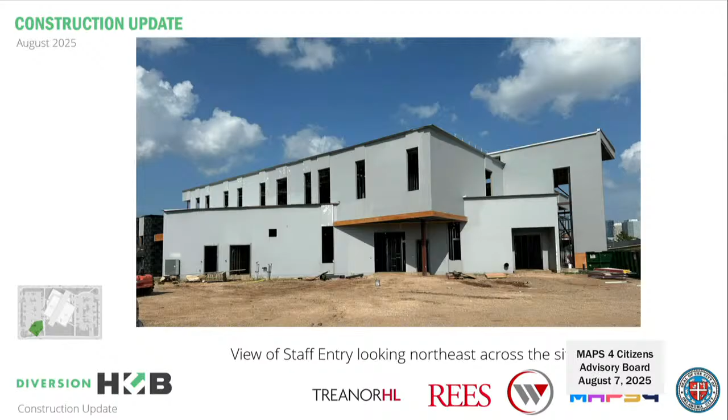This is kind of the southwest corner of the building looking northeast. It's the side of the main entrance for the staff. There's already a lot of masonry going up on that side of the building. Just another view of that side, swinging around to the right a little bit. If you go out on the site today, that area looks very different - there's a lot of activity, a lot of materials out on site.

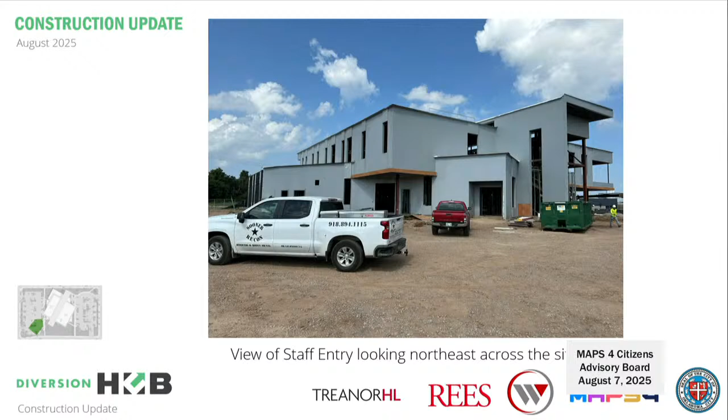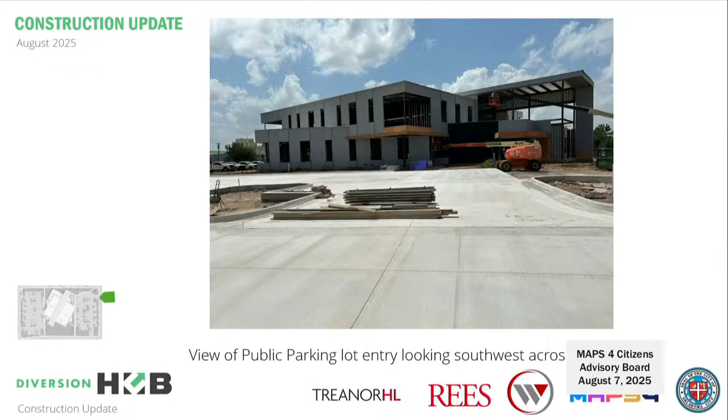In addition to the masonry going up, they have begun some of the work on the metal panel. They have a large metal panel mock-up for the composite panel sitting on the west side of the site. This is a view looking to the southwest, so you're seeing the northeast corner of the building - the main entrance, some of the parking lot has gone in on the east side. This is looking into the main entrance and lobby.

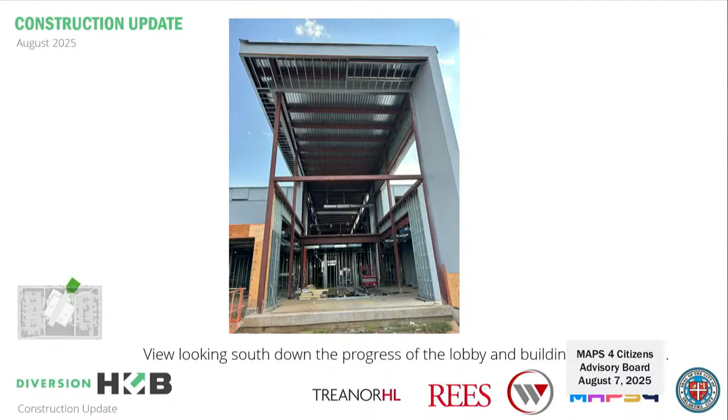The actual entrance is off to the left, but again, lots of progress there. You're starting to see a lot of the interior steel framing going up. I would say the interior steel framing is pretty substantially complete. They're just wrapping up details, some recesses for technology, monitors, et cetera. You're going to see in a minute some of the electrical and mechanical roughing that's happening.

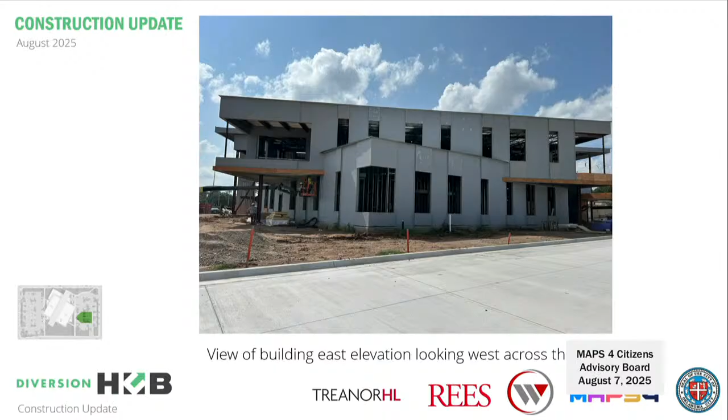This is the northwest corner of the building looking southeast - this is the training room. And again, that side of the building where the staff was - I'm sorry, this is actually the southeast corner of the building. This is the back of the building, the south end.

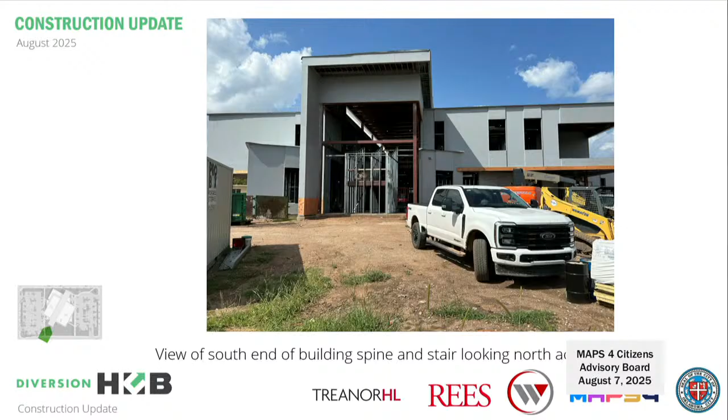You're seeing what will be a large expanse of glass looking into the staff entry. That's the staff staircase that goes up to the staff workspaces, which are really coming out fantastic. All the metal framing you see there is temporary - that's going to be a glassed-in stair. There'll be some area underneath the stair for staff to use as another place to work or just to get away for a little bit. But it's going to be a really, really nice space.

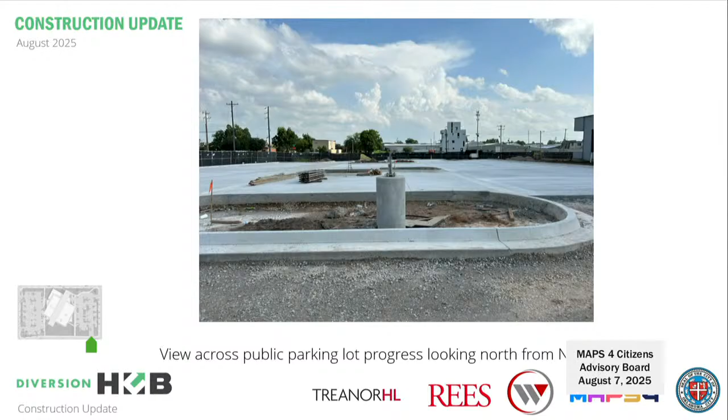Again, just more progress on some of the site, parking. As I mentioned, lots of work going on the exterior skin of the building. Mock-ups going up, mock-ups getting approved, lots of masonry going up all over the building.

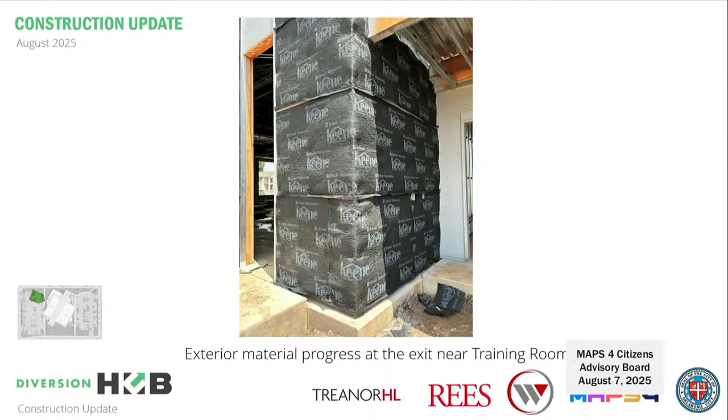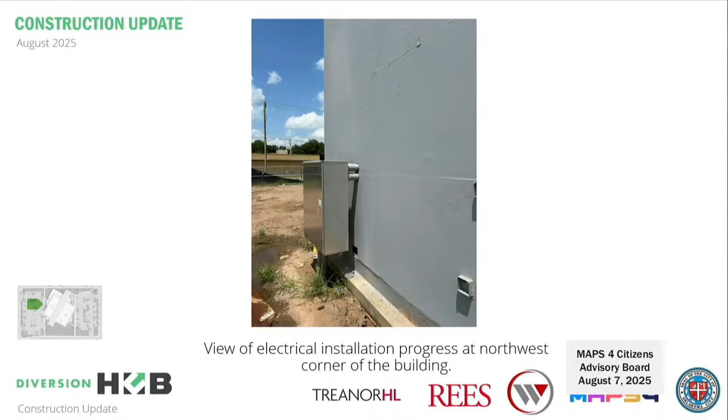A lot of the electrical infrastructure and installation is in progress. This is another one of those spots, if you went out there today, it would look vastly different. The box had been removed, masonry has been installed, the box has been reinstalled. Lots of good progress there, and lots of electrical installation and infrastructure going inside the building as well.

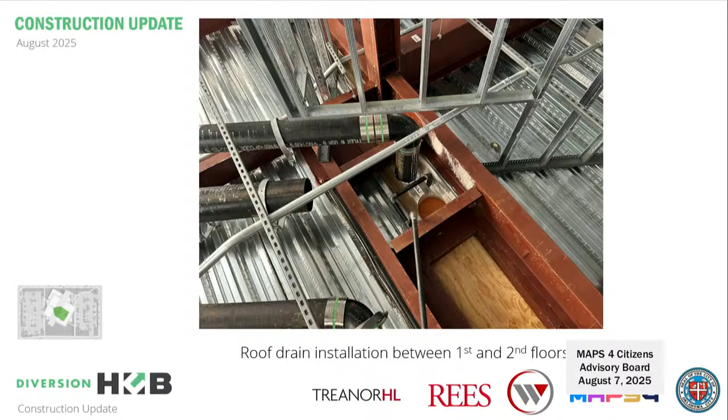Lots of coordination with some of the mechanical and plumbing items. You're seeing a photograph of some of the roof drains coming down and coming through the floor from the roof into the second floor cavity. And then just a shot of some of the electrical work that's going in, with support bracing for some of the monitors and things that are going in.

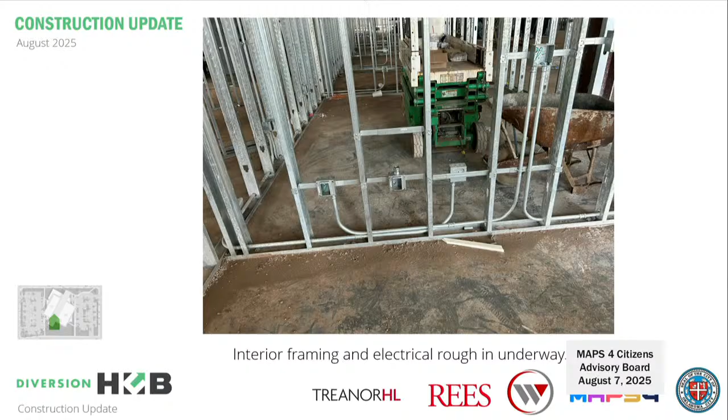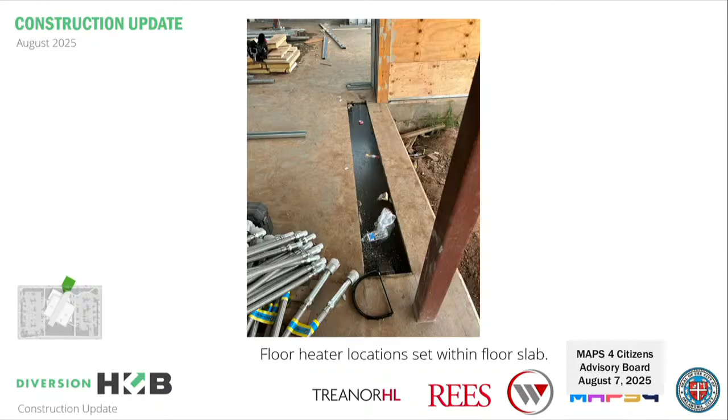We've got an interesting building with some interesting conditions, so we've got some floor heaters going in. Those mostly are going in on the north side of the building in the lobby atrium area up against those large expanses of glass.

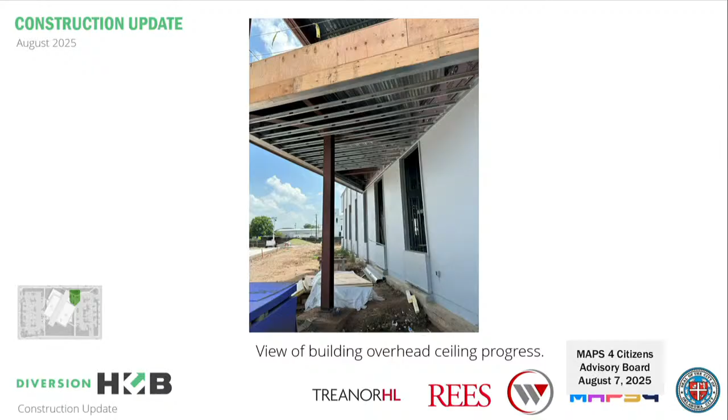Again, work on the outside continues. You're seeing some of the exterior ceilings going in, so that is below the staff break area. And then a view from inside.

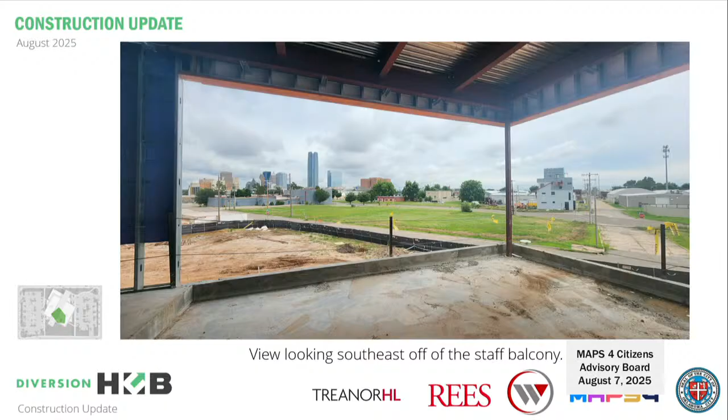This is one of my favorite things when I was out on site. You're going to get some really spectacular views of downtown. Unfortunately we don't have it in this slide deck, but there's some really amazing views looking east down 6th Street. You can really get a feel for what's happening in this part of town and how things are coming our way. Just being part of the project team and the diversion hub, this area of town will look vastly different in the next 10 or 15 years, and it's really exciting to be early in that process of making that transformation happen.

More, just a look at some of the interior steelwork. This is really fun too because I think we're starting to really get a feel for just the way the building lays out, how some of those spaces feel horizontally and vertically, just what the volumes of spaces look like.

As I mentioned, super, super excited about that second floor and staff work area. It's going to be amazing compared to what they have today. I think it's going to really help them do more and better things.

One of the things, and it's not necessarily as relevant to the project here, but the program is doing so well, they're growing so fast. They've actually grown into Cleveland County beyond Oklahoma County. So I think that's a testament to how well this program is working and what it's bringing to our communities in central Oklahoma.

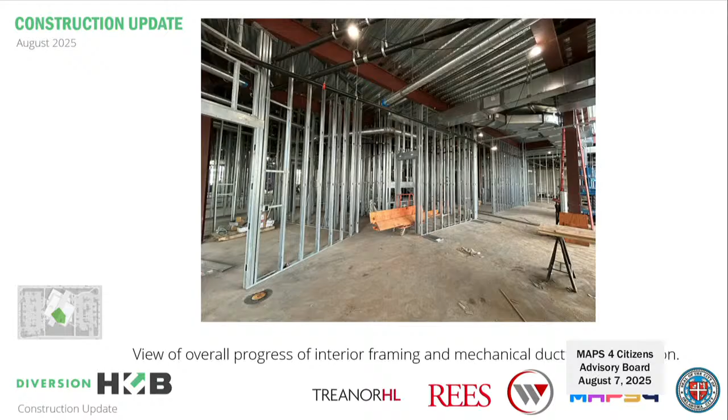One of the things that we discussed in our meeting earlier this week is change order number 3. We have 7 small change order items that we discussed. Let me flip to that page. So the majority of those are structural, mechanical, and electrical changes.

Those were all necessary after construction began, so we're coordinating on-site as-built conditions that happened during construction, engineers' drawings, and the subcontractors' drawings. All of the concrete structural items were identified before the concrete was actually poured, so really it involves some modification of formwork just to coordinate with what's happening in those areas, and I'll go through those quickly.

So we have some column base modifications. We had to adjust the height of 8 column bases to make sure that they were in the correct height for the steel columns. That was a concrete issue.

There were some slab modifications to coordinate with the floor heaters, so you saw that slot in the floor in one of those earlier slides. One of the things we wanted to make sure was we had the correct clearance between the back of those heaters and the exterior windows, so that was coordinated. There was a concrete grade beam extension at the main entrance, so we have some conditions where we have some thickened walls, and there was one area where we had to expand that a little bit to make sure that we had full coverage under the wall.

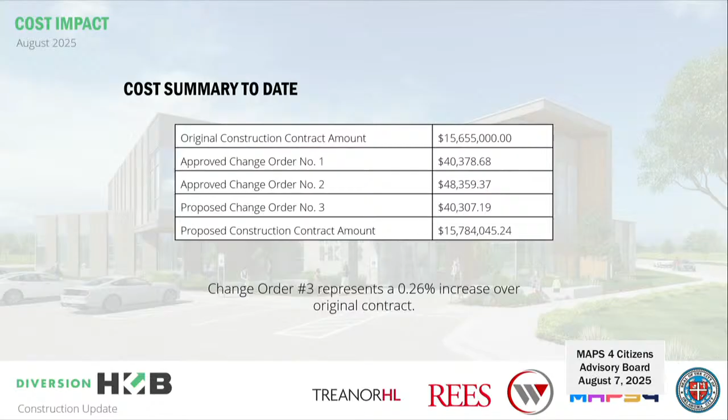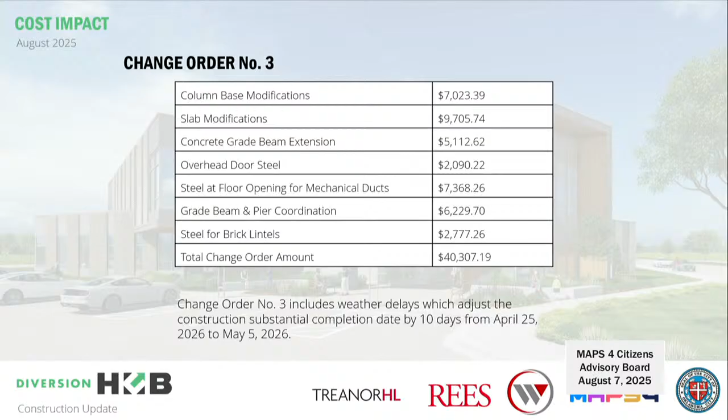As I mentioned, it's been a really wet summer, but the contractor is doing a great job trying to catch up. We're still looking for completion in spring of '26. One of the questions asked by the committee was how far along we are - we're around 50%-ish done with construction. It seems like maybe there's more because the building envelope is pretty close, but there's a lot of work to do on the inside.

So just a 3-month look ahead: finishing up the exterior framing and sheathing, there's a little bit left to do there. Roofing is being installed, rooftop equipment gets installed pretty soon. MEP rough-in is ongoing. The perimeter sidewalks around the site, the ADA sidewalks, should be complete by mid-month. Really, the next step on the inside is starting to put up some of the drywall, which will happen in the next few weeks.

Next week, some of the windows are going to start going in - they haven't put up the framing for the large expanses of glass yet, but if you're out on site you can see the square rectangular openings. They've already got some of the aluminum in there for the windows, so that's progressing. We expect the building to be weathered in by the first week of September. Lots of exciting stuff. Masonry and all that is ongoing.

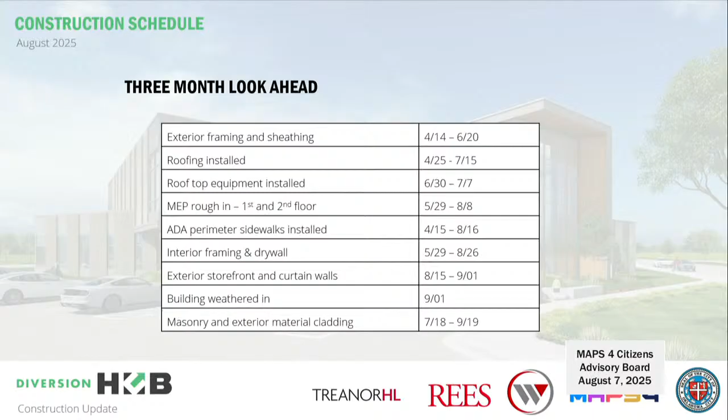So just to wrap up before I open it up to questions, I want to express the whole project team's thanks to the City of Oklahoma City and the MAPS office. The MAPS office has been fantastic to work with - we absolutely love Jim, he's the best. Also the Diversion Hub staff and the Arnall Foundation have been a great client, a great partner, and great friends. So with that, I'll open it up to any questions.

Thank you for your presentation. Any questions for Farouk? Okay, no. Great job, you covered it all. Thank you. I expected a tough question from Todd.

All right, moving on to item 2D, recommend approval of change order number 3 with Wynn Construction Company for the MAPS 4 Diversion Hub project for $40,307.19. I'll take a motion and a second.

Okay, the motion passes. Thank you, and thank you again for your presentation.

2E, construction update on MAPS4 Innovation District Connectivity Phase 1. Continuing on with our construction updates, we have a project for connectivity in the Innovation District. Luke Schmidt from Kimley Horn is here to take you through this presentation.

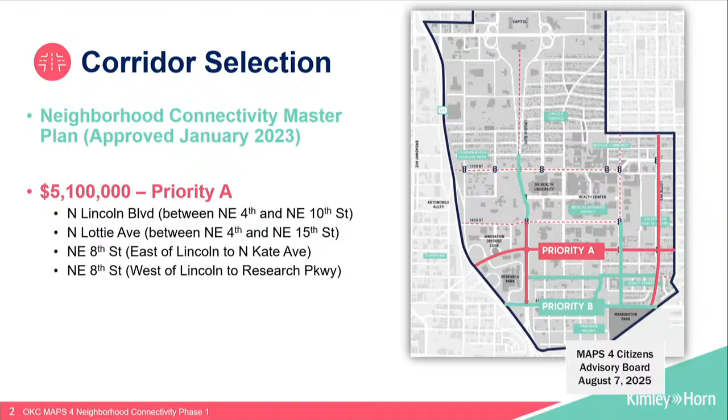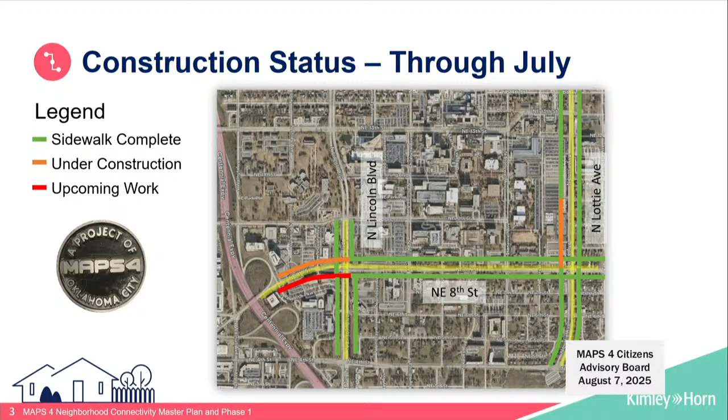Want to give a quick update on where the contractor is today. We've seen a lot of progress over the last month since we've last been here. The contractor has wrapped up a lot of the Lottie sidewalk improvements. You can see there's a section that one crew is working on as they travel south down Lottie. Also, Northeast 8th Street is currently under construction in front of the Convergence area. So really excited for all the great work that's been done over the last handful of months.

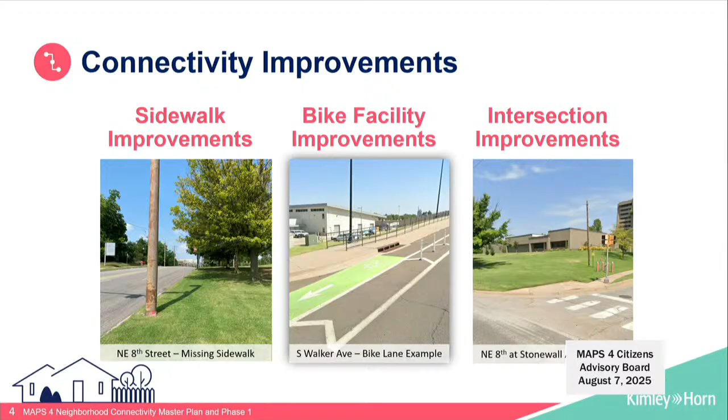As a reminder, this project is a mix of sidewalk improvements, bicycle facilities that are upcoming, as well as intersection improvements. A lot of the sidewalk and intersection improvements y'all can see out there today. This project has over 3.5 miles of sidewalks and 23 intersections being modified. So a significant amount of infrastructure being implemented as part of this initial phase of the project.

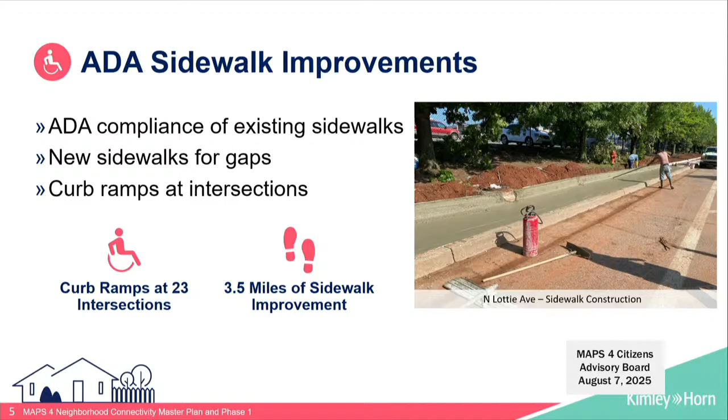So with that, I'm going to turn it over to Christina to give a couple updates on what we're seeing in the field. Thank you, Luke. I wanted to touch on some of the completed improvements we've seen as part of this project. There's a handful of construction groups working, so we're kind of spotty in the areas we've touched so far. We do have completed improvements on Lincoln, Lottie, and 8th Street.

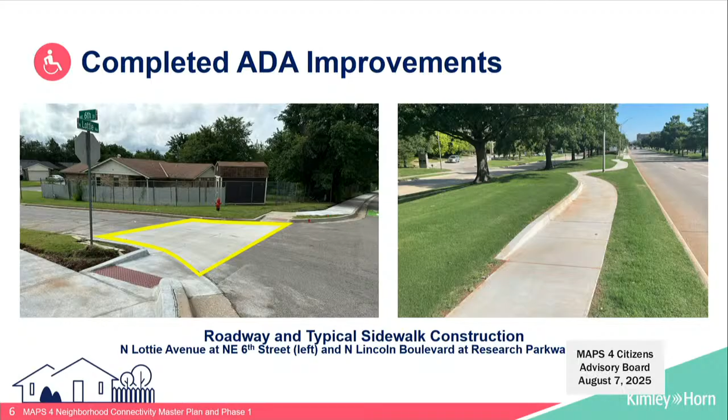Some of the pictures shown on the screen include ADA improvements along linear sections of sidewalk. On the right, we have a photograph from Lincoln Boulevard, where we continue the concept of serpentine sidewalks to create a comfortable, inviting environment for folks to walk around on. On the left is also improvements on Lottie Avenue that are pretty typical throughout the project: curb ramp improvements at intersections, side street improvements as needed for ADA compliance.

Looking at some in-progress ADA improvements along Lottie Avenue specifically, we had a few drainage things we needed to work through. On the west side of Lottie, it captures all of the water that flows off of all the parking lots from the OU Health facilities, so obviously a large amount of water coming through this area. There were some existing drain structures that had been collapsed or were in poor condition currently.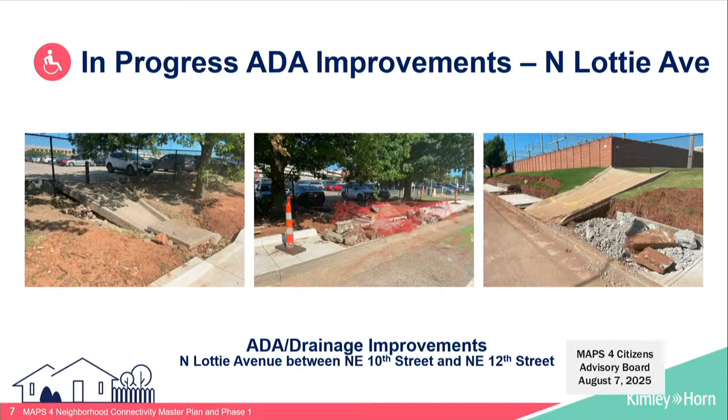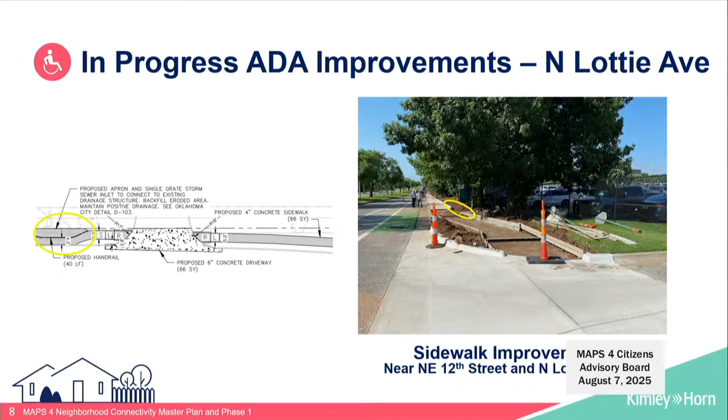Looking at more improvements here on Lottie, just north of those drainage improvements we were just looking at, I wanted to highlight how the contractor's been able to follow very closely our plans. Moving through the drainage and then into the driveway improvements, we made sure we kept an ADA compliant pathway throughout, with the minimum widths needed, moving from drainage to driveways all along the frontage of Lottie, along the OU Health parking areas.

Looking too at the paver enhancements, this photograph is from the intersection of 8th Street and Lincoln. We've gone through on the northwest and northeast corners, pavers have been installed. Those two corners are basically wrapped up.

We have signal improvements in there as well. We wanted to make sure that we had a design that worked to be able to put signal poles in an area that would be acceptable for ADA compliance with the push buttons before we went and put the pavers in, just to make sure we weren't tearing out pavers that were already put in.

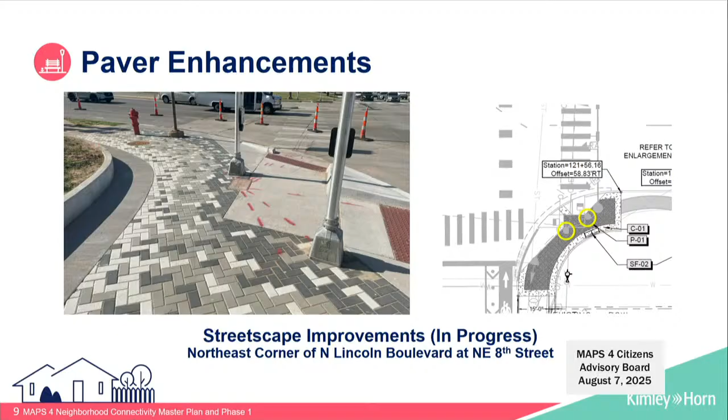So Rudy's done a great job of taking our design and making it real life with these pavers. At the intersections, we wanted to have a visual enhancement, so we proposed a gradient moving from darker to lighter pavers just to create a little bit of visual interest at the intersections.

Talking more on the traffic signal upgrades, this picture is still from 8th Street and Lincoln. Like I mentioned, the northwest and northeast corners are done, so we have the PED poles placed and the pavers in. Since the southwest and southeast corners are still under construction, we have those PED heads taped off for now, but we're making progress on the signal improvements throughout the project.

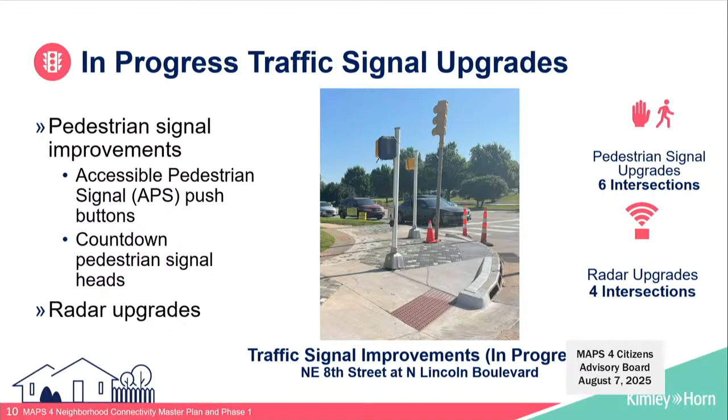Just a reminder, we're doing radar improvements as well as part of this project. There are 4 intersections that currently did not have radar or did not have sufficient radar, so we're making those improvements as we move throughout the project.

Looking at Northeast 8th Street, as a reminder, that's our enhanced area. We have a lot more landscaping improvements and more hardscape improvements as well. Something in the past few weeks that the contractor has been working through is the installation of the Silva cells.

The Silva cells have gone in very quickly. They dig about a 4-foot deep hole, drop the Silva cells in, and then backfill with less compacted dirt. That's going to allow, in between the Silva cells, loose dirt for the tree roots to grow into, instead of having to grow into soil compacted by layers of pavers, sidewalk, and concrete.

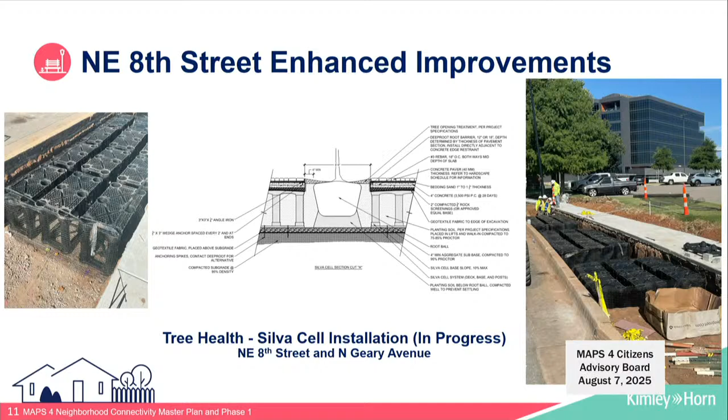So we're making sure we're giving these trees a good chance to survive, and making sure we have a holding place for water, since they'll be in a large paved area — just making sure the trees have what they need to be successful growing here.

Looking at Northeast 8th Street, we have that gradient where we move from a more traditional sidewalk improvement and signal improvements, moving west towards the Innovation District Hall, into the enhanced area with more landscaping. The intersection here at Geary is a bit of the split of where we move from a more traditional sidewalk project into a sidewalk streetscape landscaping design.

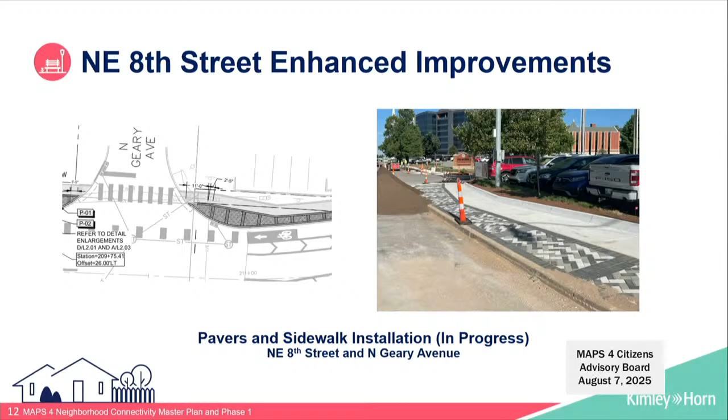We have benches going in — this is that linear segment of sidewalk. Earlier I mentioned that the intersections have the gradient of pavers going from light to dark. We wanted to make sure we had those same color pavers throughout, but here we have more of a blend that draws your eye linearly as you go down the project and takes you to destinations on either side.

Looking at the amenity zones, we have these throughout the project, not only on 8th Street but also on Lincoln and Lottie Avenue. These are just going to be intermittent throughout the project — little areas just off the sidewalk to allow people to stop and take a break when they're on a walk. There are a lot of folks walking around, whether they're residents of the area or people working over at the OU facility.

We've seen a lot of people on our site visits taking a stroll around lunchtime too, so giving people a place to stop, take a breath, look at what's around, and enjoy what we've put in. These amenity zones are under construction now.

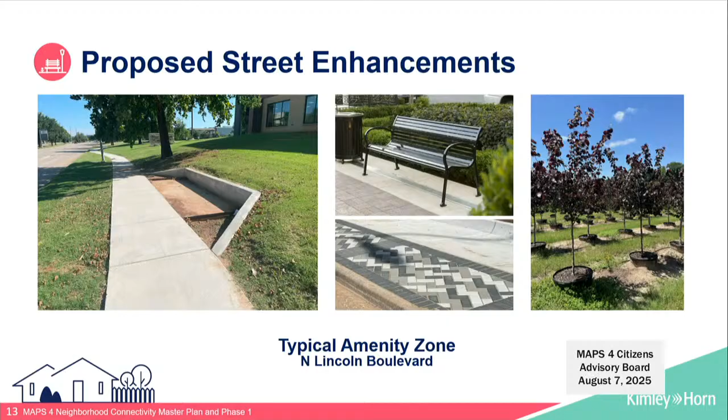Most of them have the pad put in, along with the walls on the back end of the amenity zones. Upcoming is installing pavers on top of the concrete base and benches. Alongside the benches, we'll have an open area as a buddy space for wheelchair users to stop and sit as well. We also have Merlot red buds going in on either side of the amenity zones to create a little shade and visual interest with their vibrant colors.

Along this project corridor, there were a handful of bus stops that were not already improved. So we went ahead and took those bus stops and put in pads compliant with the new bus stop requirements. Now whenever construction is done on this project, all of the bus pads will have been completed in the area, and they'll be ready for benches, amenities, trash zones, and stops to be installed on top of these pads as part of this project.

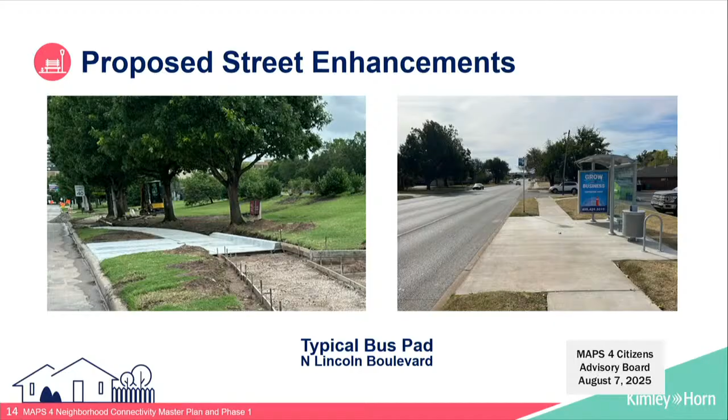So, kicking it back to Luke.

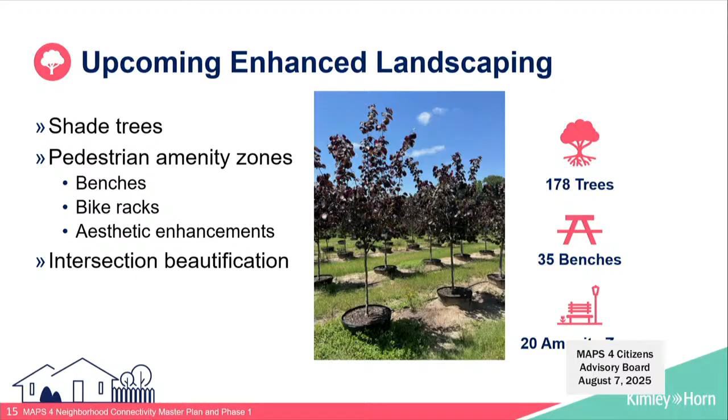A lot of exciting things to look forward to in the next few months. We'll start to see landscape improvements coming in the next handful of weeks, including shade trees in the pedestrian zones and some additional intersection beautification. Also, Northeast 8th Street will have bike lanes at the end of the project, so once construction's done, we'll be able to restripe Northeast 8th Street. You can see a cross-section of what that looks like.

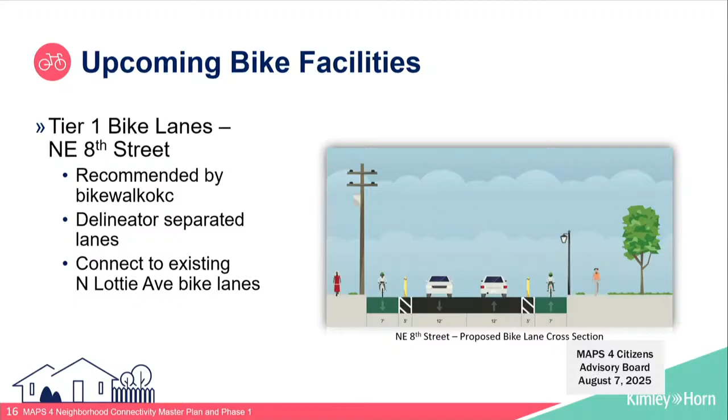From a change order standpoint, we just have one change order on the project currently, with a total project budget of just over $3.5 million as we stand today.

From a schedule standpoint, the current schedule shows construction wrapping up at the end of September. We're working with the contractor right now; this may slide out a bit so we can have a more optimal time to plant trees. Today's not a great day to plant trees, so we're looking at extending that potentially so we have a better shot with some of the trees along the corridor. We'll have an update next time with what the final schedule is.

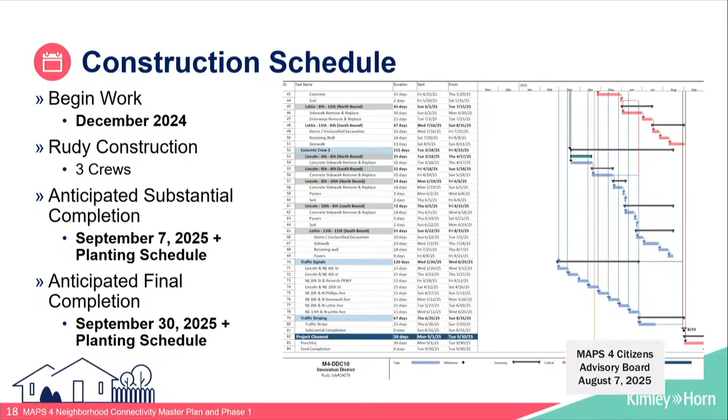Appreciate it. Absolutely. Okay, item 2F: recommend approval of engineering services contract with Kimley Horn and Associates, MAPS 4 Neighborhood Connectivity Phase 2, for a fee of $644,720.

There are two phases to this project, as Luke just described. There's a second phase, and we did interviews in the usual manner, interviewing three firms, and Kimley Horn was selected to do the second phase also. So that's what you're seeing here in this contract.

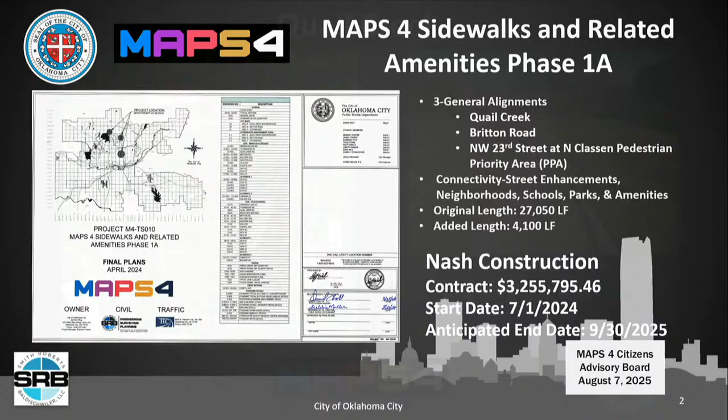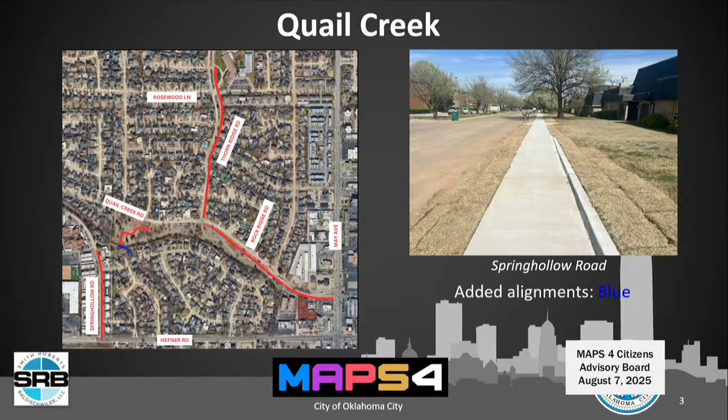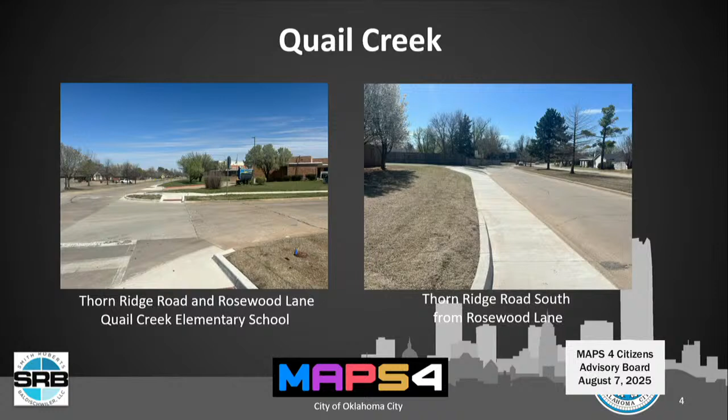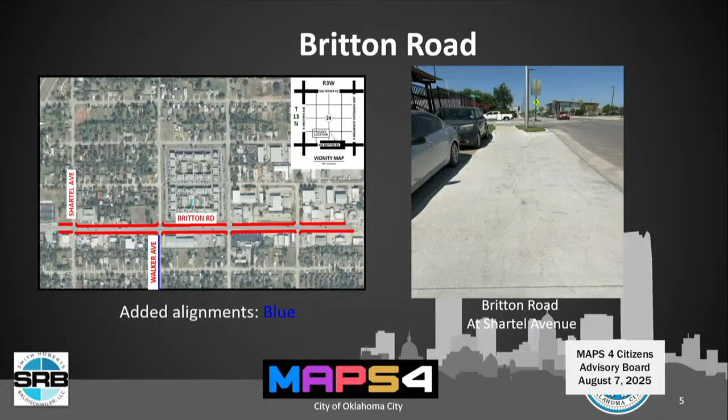Continuing on Britton towards Robinson, just west of Harvey, you can see in the left picture a water utility box we had to alter and raise to make it flush with the sidewalk. On the right, you can see the utilities in the way, like the manhole, that we had to maneuver around.

Another good example of the driveway issue is across the street at the Casey's, another large driveway we had to replace entirely to keep their business running.

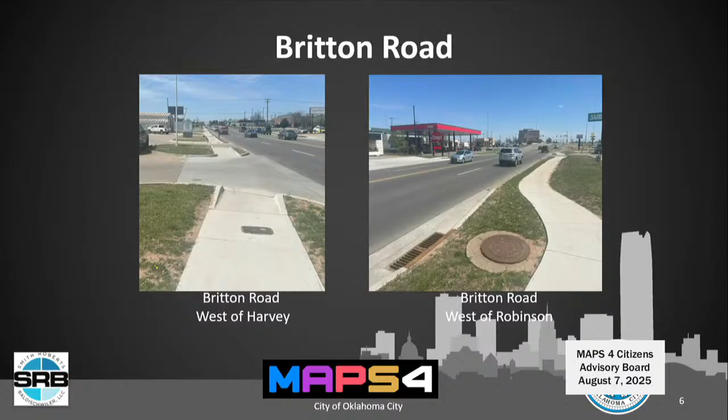The additional alignment I mentioned at Walker connected the Oklahoma Foundation for the Disabled from their campus north to Britton Road. That was approximately 3,700 feet of additional alignment. We connected directly to their sidewalk at the parking lot, crossed Walker, and allowed them to go all the way to Britton.

The 23rd Street PPA includes Military Avenue, one of our longer alignments, going from 26th to 30th Street. We were really choked down with right-of-way and utility issues here, so here are some examples of what we had to deal with.

We used backside curb to deal with the utility poles and grading issues, and did a lot of curb and gutter and street repair. The curb wasn't in a condition in a lot of places to allow our sidewalk to abut up to it, so we had to replace a lot of that.

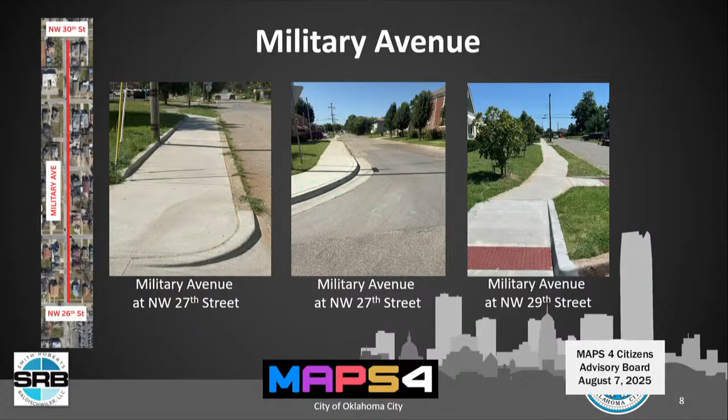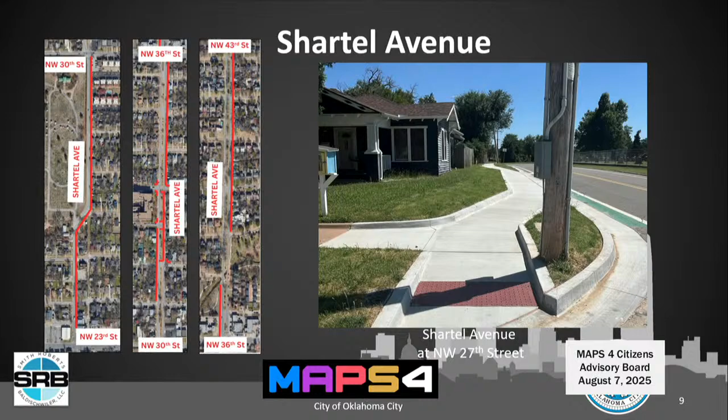Shartel is our longest alignment on the project, from 23rd to 43rd, including the Crown Heights neighborhood. Again, right-of-way and utility constraints caused overruns on some curb and gutter and backside curb, again for grading and utility issues.

We dealt with Crown Heights a lot before the project even started, with multiple neighborhood meetings. This is their finished product. We moved the curb out 4 feet, narrowing the driving lane to allow for one lane and a bike lane. They requested colored concrete, which is why you see a slightly different shade, and they also requested metal tactile warning devices instead of the bright red plastic ones, so they received those too.

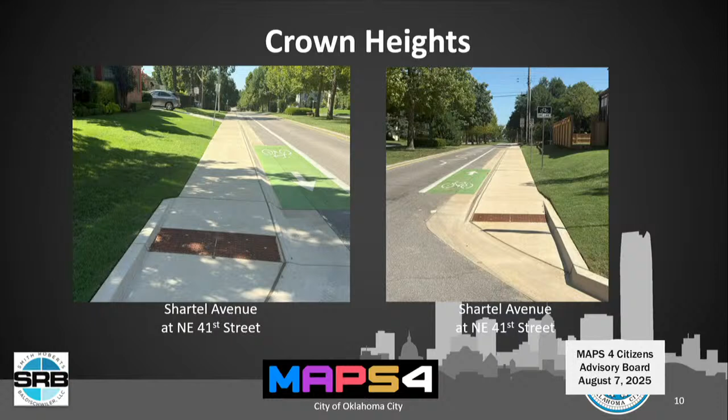Western is obviously another busy thoroughfare. The 36th Street intersection is on the right - we did half of that, and we're now just finishing the west side of that intersection.

The center picture shows an extensive driveway repair we had to do beyond what the original plan called for, and there's more backside curb on the left, constrained by right-of-way and grading issues.

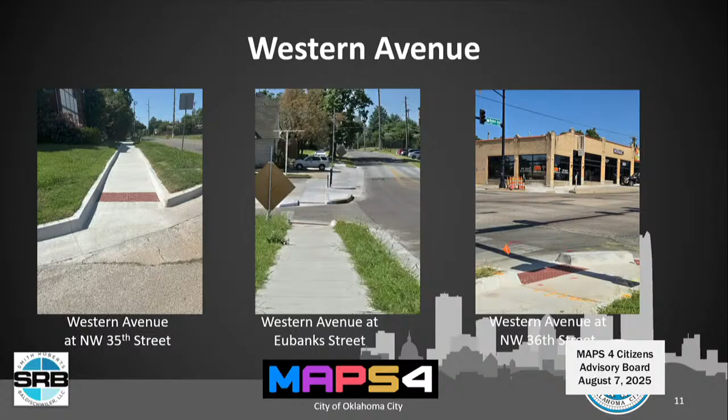This is Amendment 3: additional curb and gutter, variable height curb like I showed you on the backside of the sidewalks, some pavement repair, ADA curb ramps, utility box adjustments like the ones on Britton, and numerous driveways.

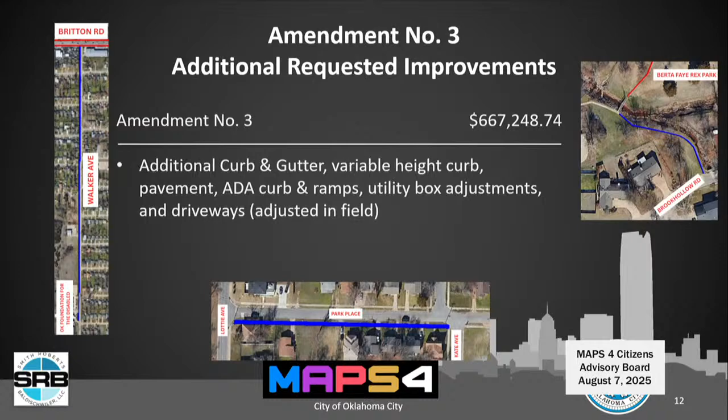The change order also includes additional sprinkler heads and sprinkler lines we ran into that weren't in the original plans, and the additional time needed for rain. We were caught up until April, but had more rain in May and June, so this change order adds the additional days needed to complete the project.

For the overall budget, our original fixed construction estimate was $3.7 million, and our original bid was a little over $3.2 million. Through our amendments and change orders, we're now up to about $4.6 million.

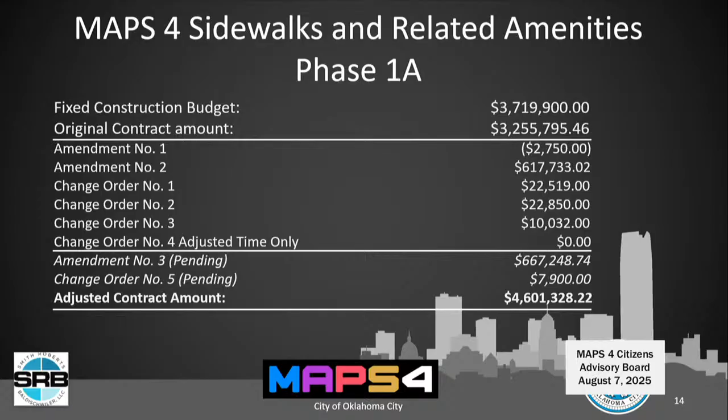With that, any questions?

Yeah, that's a big difference in the cost of the budget. Just a big difference, yes.

Well, we added that alignment in there though - yes, we've added quite a bit. It isn't just changes, we added an entire alignment. How long was that, Grady? Roughly - the Walker alignment is about 3,700 feet, but in all we've added 4,100 feet of additional sidewalk alignment here. So it's additional work, not just cost increases or overruns, it's more sidewalks for the project. That makes me feel a little better.

Yeah, I was with you. Okay, other questions for Grady?

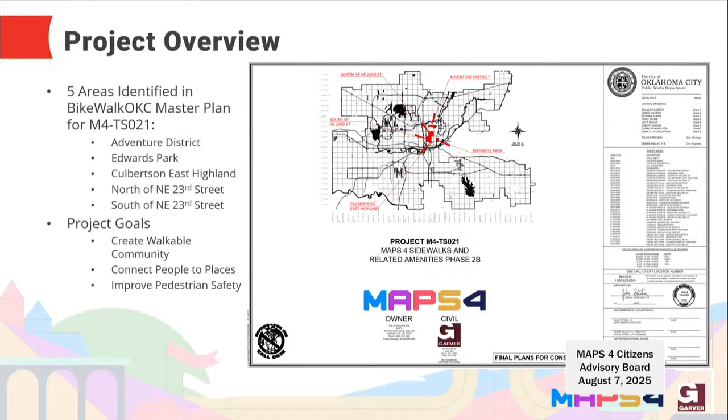Good morning, everybody. My name is John Strayhorn with Garver. I'm here this morning to present on the final plans for the Phase 2B Sidewalks and Related Amenities project. From the Bike Walk OKC Master Plan, there were 5 areas identified for Phase 2B, including Adventure District, Edwards Park, Culbertson and East Highland, and north and south of Northeast 23rd Street. Some of the project goals, also from the Bike Walk OKC plan, are to create a walkable community and ultimately improve connectivity and pedestrian safety.

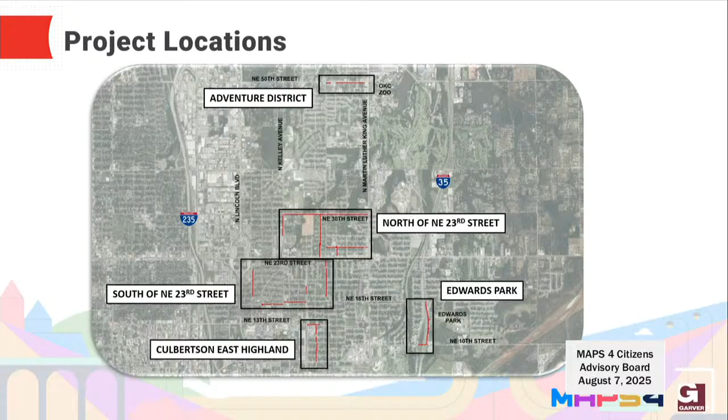Here's a bigger map of how these 5 areas lay out in relation to one another. Each area is boxed in, and you can see the red line work inside of those — those are our proposed sidewalks. The Phase 2B project is a very standard sidewalk project, nothing fancy, nothing complicated, pretty cut and dry. With that in mind, let's take a closer look at each of these areas.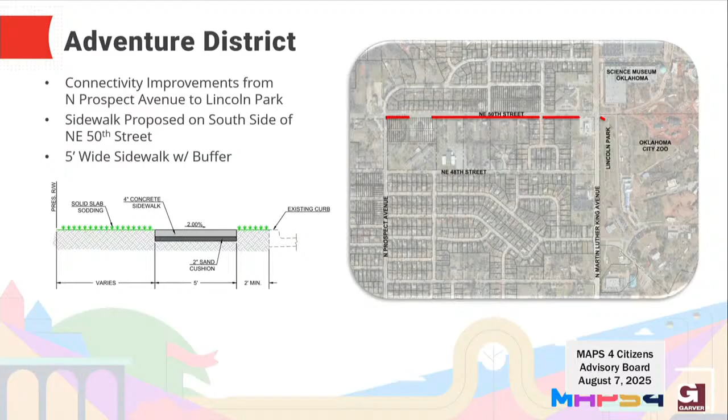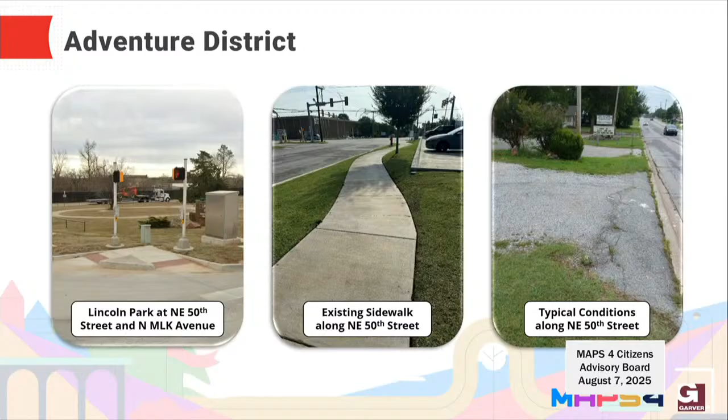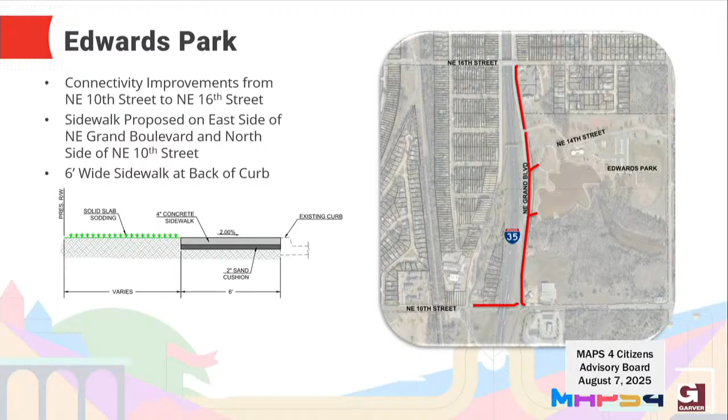Next, we'll look at Edwards Park. This will make connectivity improvements along 10th Street as well as Grand Boulevard. There are a couple extra little segments coming off of the Grand Boulevard sidewalk — that's where we're actually going to make a connection into the Edwards Park existing sidewalk network.

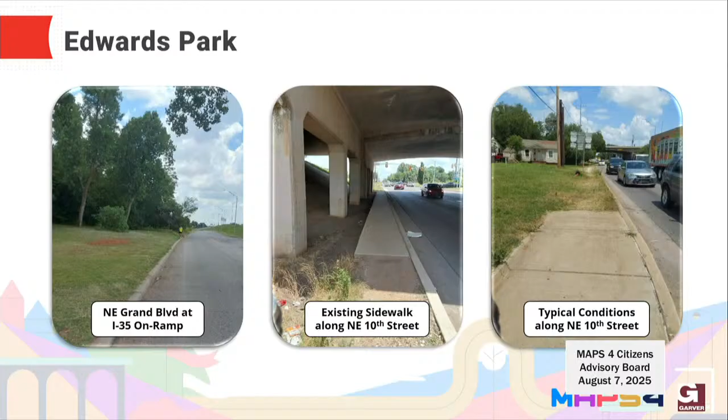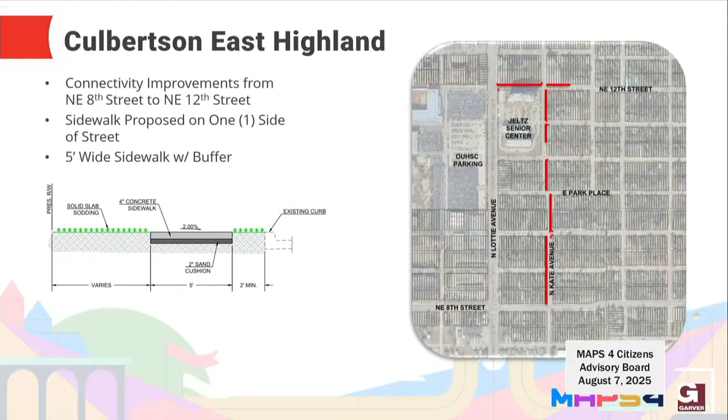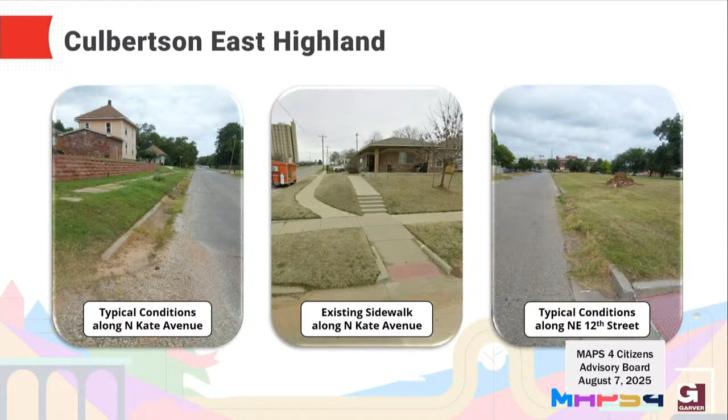A few site photos from this area. The first and third photo along Kate and 12th Street are good examples of needing to replace sidewalk that's not compliant, with the left picture, and then fill in gaps in the sidewalk network with that third picture. That second picture along Kate Avenue is one of those existing compliant sidewalks that we're tying into.

Looking at our fourth area, north of Northeast 23rd Street, this will provide connectivity improvements along 30th Street, Kelley Avenue, Fonshill, 24th, as well as Jordan Avenue. Sidewalk in this location will be proposed on just one side of the street only.

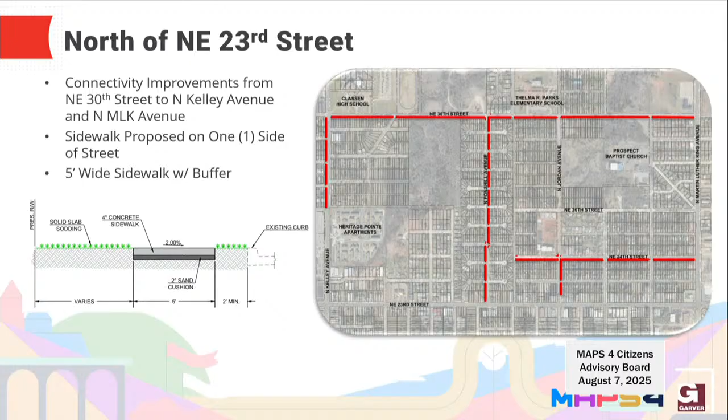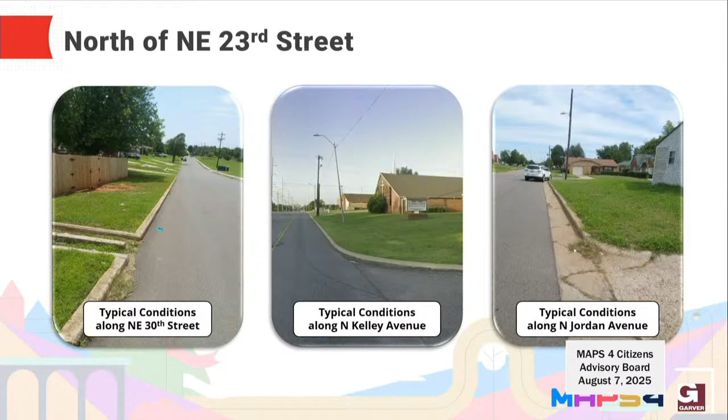Our last area is south of Northeast 23rd Street. Connectivity improvements here will be along Lindsay, 16th Street, Lottie Avenue, as well as Prospect Avenue. Similar to the north area, sidewalk will be proposed on just one side of the street.

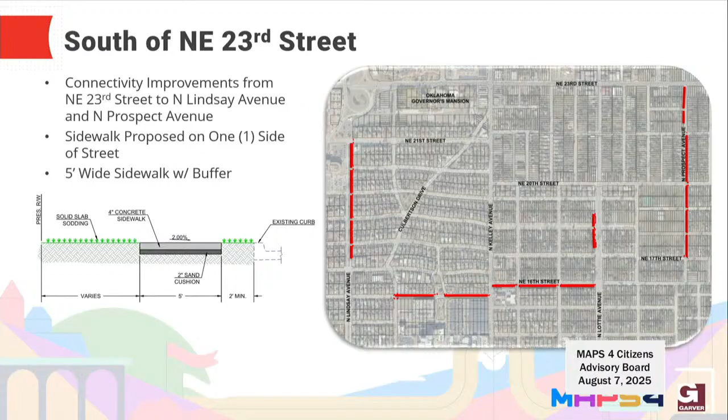A few site photos from this area. Again, that left photo is another good instance of a typical design challenge we saw here, needing to design our sidewalks around overhead electric poles. The second and third photo, with Lottie Avenue and 16th Street, again show filling in gaps in networks and replacing sidewalk that's not compliant.

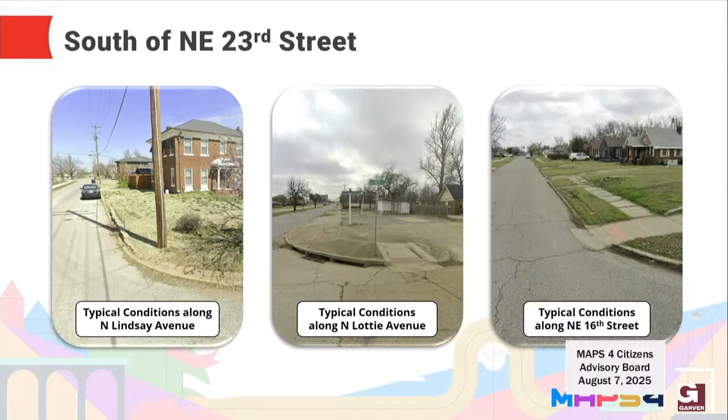Now let's move on to estimated construction cost. The Phase 2B construction budget was about $3.94 million. Below there you can see a generated estimated cost for each of those five areas, which sums to about $2.85 million, leaving us with a Phase 2B budget balance of a little over $1 million.

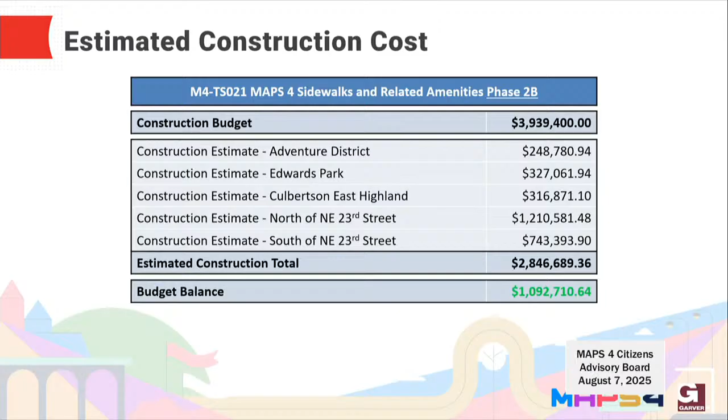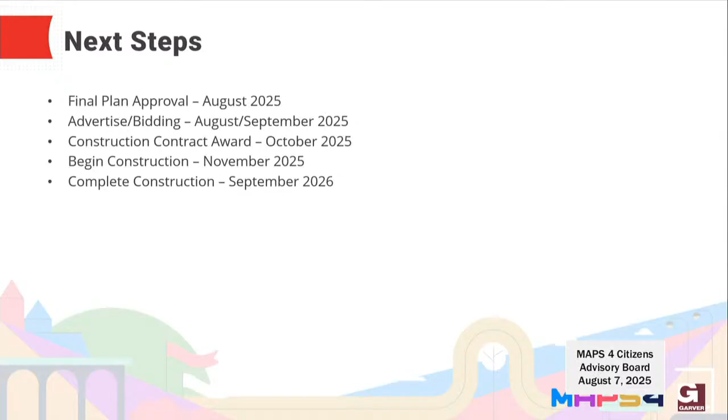Next steps, looking at schedule here. We're here today presenting on final plan approval in August, pending council approval next week. This project will be advertised in August with a bid opening in September, and a construction contract award following in October. That would put construction starting estimated in November 2025, with a duration of 10 to 11 months, completing in September of next year.

With that, I'll take any questions or comments. Any questions for John? Ryan?

Similar to the previous presentation where I guess they filled in driveways and things like that. Will you guys be able to do that as well to kind of make the whole area look better? And then the second question is, with the $1 million extra, does that mean there will be some more alignments added to this project as well if the bids come in at this level?

Could be, yeah. So for driveway improvements, we went ahead and included all of those driveway improvements from the street back through the sidewalk crossing. So each of the driveways in Phase 2B are being improved already for the vast majority of the driveway.

Other questions? Okay. Thank you so much, John. Appreciate you being here today.

We need to approve recommending approval of the final plans and specs to be advertised for bid for MAPS 4 Sidewalks and Related Amenities, Phase 2B. Okay, the motion passes. Thank you.

Item 2J, recommend approval of amendment number 4, MAPS 3, Katy Trail connections in the vicinity of Northeast 10th Street between Northeast Grand and Windermere, and the MAPS 3 Air Depot Trail, Air Depot Boulevard between Southeast 59th Street and I-240. This is a MAPS 3 project. It is completed. This is to complete the accounting.